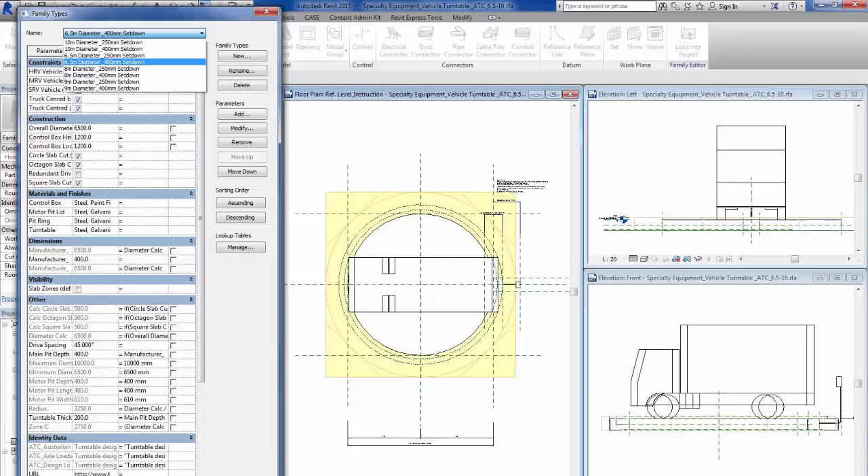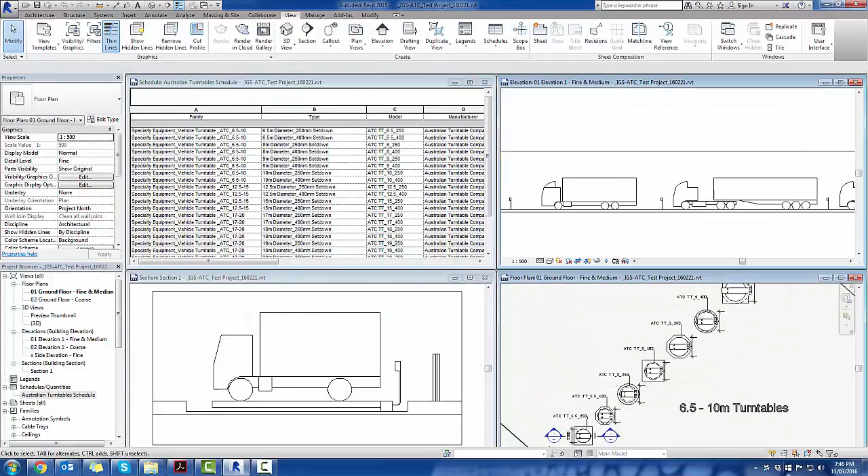Through the course of this video, you can expect to gain a greater understanding of how the Revit families have been consistently created, an overview of the product ranges available in the Revit content, as well as the selection and placement of these Revit families in a project and the key driving parameters behind each family. In addition, an insight into how the Revit families are documented and scheduled in a sample project.

The Australian Turntable Company has provided three main Revit families, allowing you to document turntables from 6.5 meters right up to 20 meters. In addition, there are standalone trucks that match the standard vehicle sizes. There's also a sample project illustrating how the individual families document and design in a project.

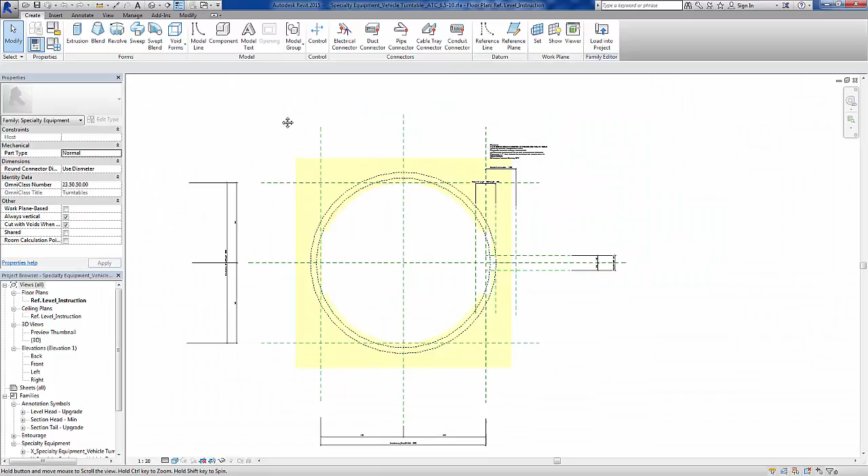What I'd like to do now is actually show you how one of the families are constructed and some of the key elements that have been considered in its creation. Like with all IGS Revit families, there is a brief disclaimer saying check the manufacturer's website for the latest information. You will also note that all reference planes have been named and set to the correct IS reference. Also, all geometry is driven from the reference planes. You'll also note that we've got our type and instance parameters all set up and driving from those reference planes.

You'll also notice at face value that we've got our Omni classification set, and as per usual, we have set up the family type properties in a way that makes sure the end user only has to deal with specific constraints and construction parameters and steers clear of the other parameters that are all the calculation parameters from the family.

In addition, we've got the standard identity data, and you will note that we have used shared parameters where possible from the Australian and New Zealand Revit standards and/or the IGS standard parameters, allowing you to schedule and document in your project consistently the turntable product as desired.

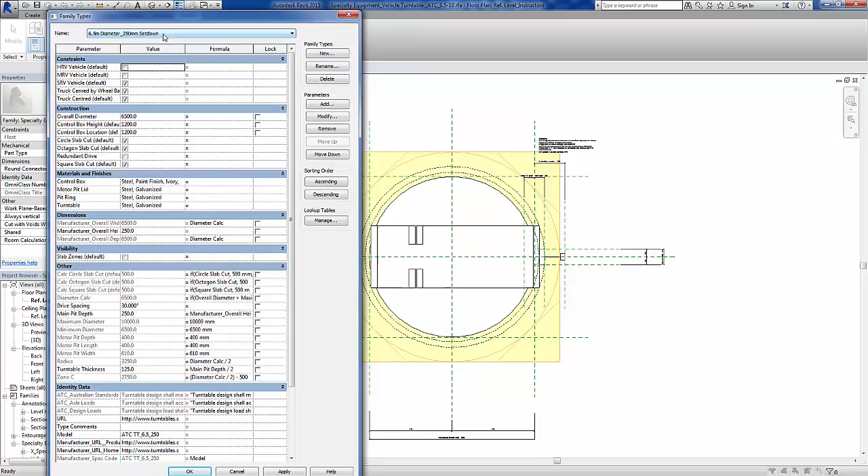So as you can see, we have included some base types that Australian Turntables has specified. This family here goes from 6.5 meters up to 10 meters with either the 250mm set down or the 400mm set down. Now the actual families, as you will see here, are actually made up of a series of nested families that are all communicating and coming together in this parent family.

But if we actually look at the main turntable nested family, you can start to see how it's driven, and again, all nice and neat and consistent. The parameters have been shared, so they report back to the parent family. In addition, you will note things like the masking regions have been applied, including the subcategories in all 2D line work, and then these have also been applied in 3D.

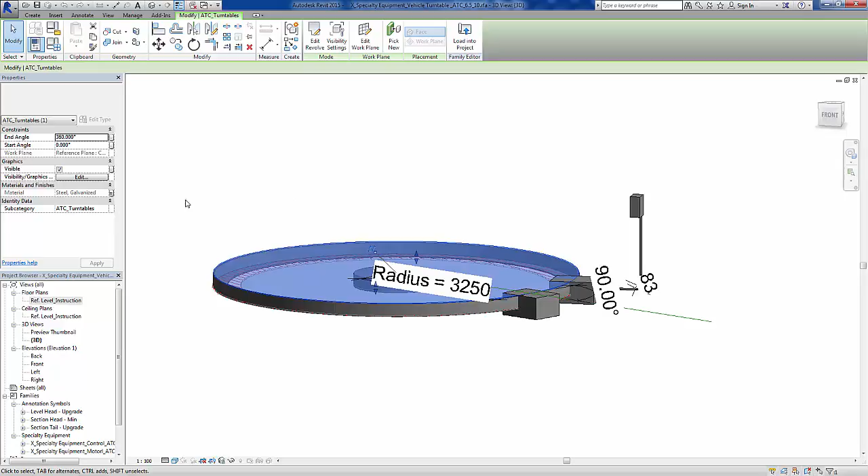But in this case, we've made specific subcategories because the Australian Turntable offering is not your standard specialty equipment, so we want them to stand out in your Revit project. We've also made sure we've purged out all items, deleted all additional fill and line patterns that come with the default out-of-the-box Revit family templates. In addition, you'll note that we've got rid of all the warnings.

So in all the nested families, this is the process we have followed. We've tried to keep them as lightweight as possible, and at the end of the day, give you the most usability and flexibility in the end project, which we will now have a look at.

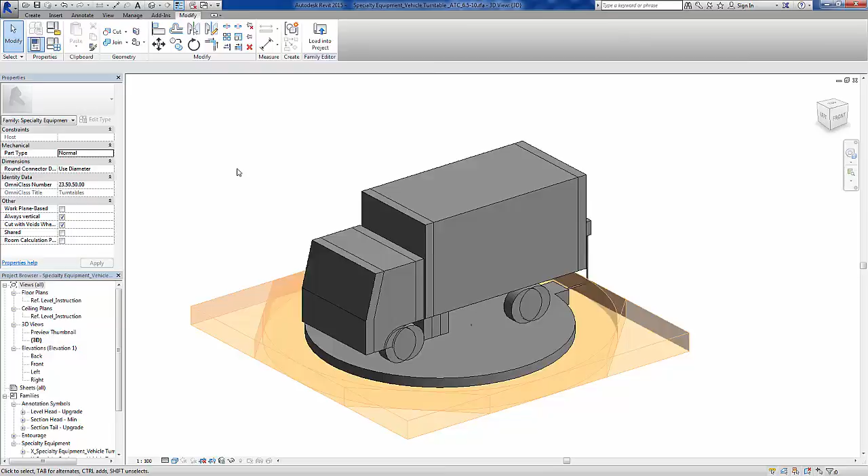I am now going to demonstrate how to use these families in your project. What we suggest, however, before we place them is to load them into Plan View as they are non-hosted, and this will load them in at the selected level. So I'm simply going to drag and drop the turntable in as we see here. I can then now grab it and place it wherever I would like.

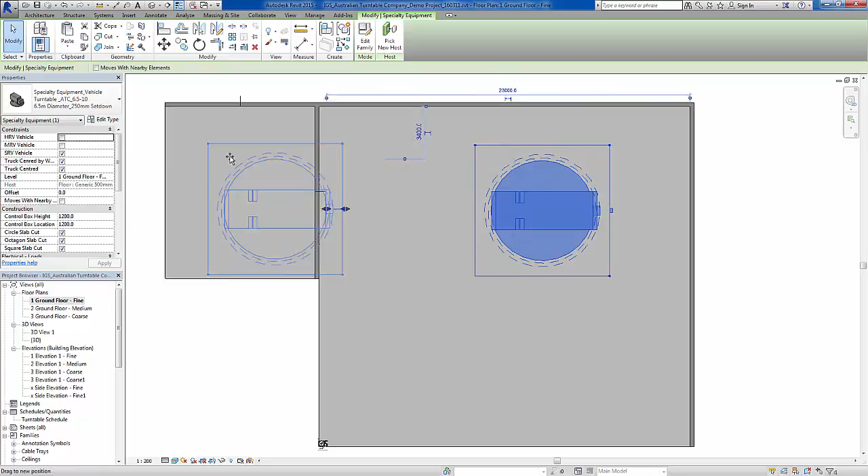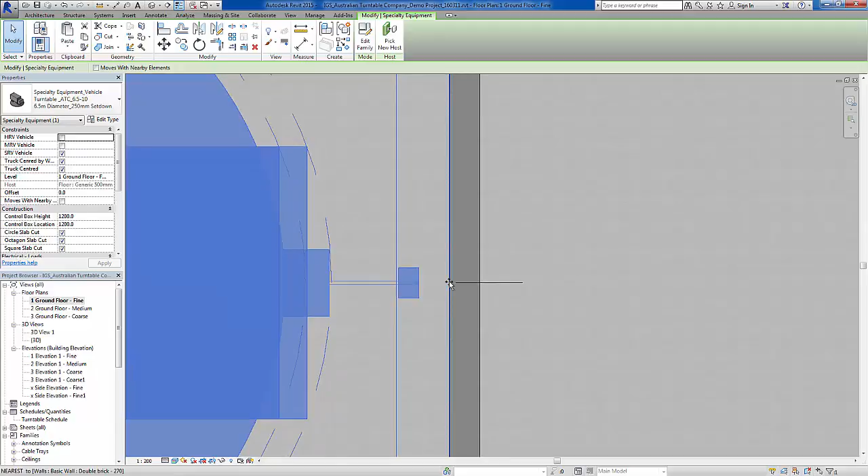I also, based on the reference planes in the family, can align it centrally to the little room I've got set up here. I've just put some annotation lines to give me those center points. Once I have the turntable aligned appropriately, I'm then in a position to drag or align the actual control box to the wall. This is an instance parameter, so it simply has those pull tabs, which allows me to do that. I can now see my turntable correctly located in this room.

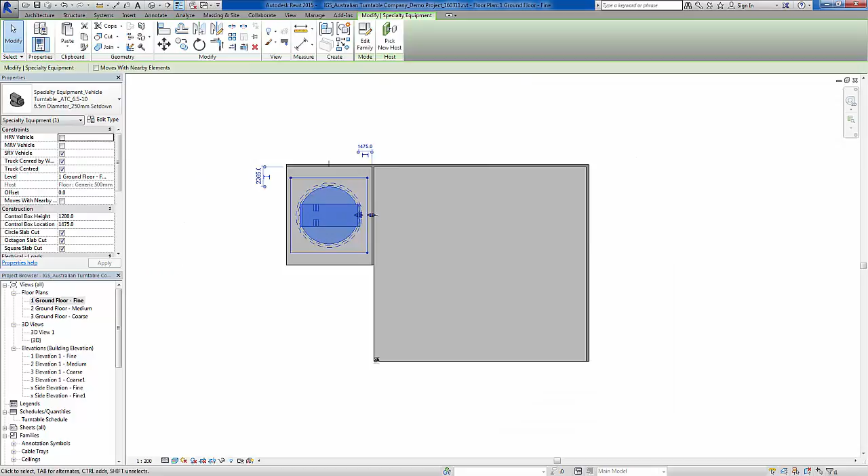If I wanted to create another version or add one of the larger turntables, I simply repeat that process. So if I go to floor plan and then I'm going to grab one of the large turntables, I simply drag and drop and place.

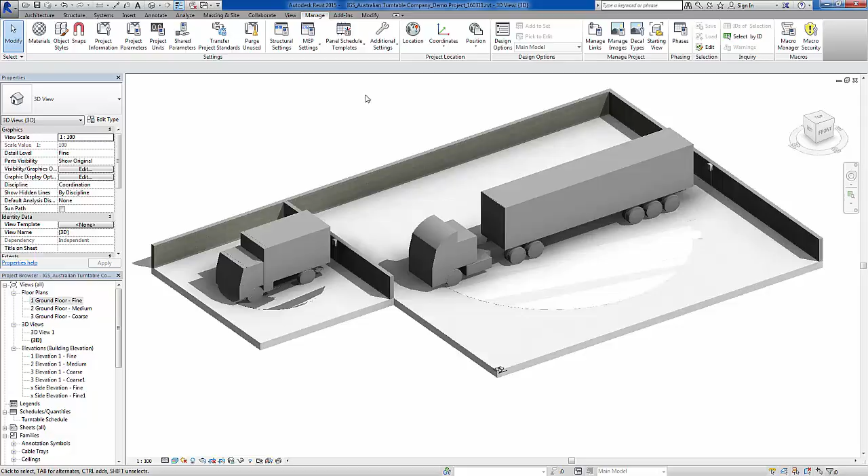And again, I align the control box. This time I'm going to use the align tool to do that. The next step is to actually cut the slab, because currently you can see the slab is not cutting, and because it's not a face-based family, it doesn't cut automatically. So what I need to do is go to the Modify tab, find Cut, and cut my slab accordingly.

You will see that by default it cuts in a square fashion. You are able to change the slab cutout shape under the properties of the family. By default they're all switched on, but if I now just turn on the octagon, you'll see the octagon shape appear. If I just turn on the circle, you'll see the circle shape appear. These allow you to create different slab cutout zones. These will be explained in greater detail soon, but this is where you activate the different functionality.

The other aspects that you can change in the project here are whether the truck is centered via its wheelbase or whether it is centered via the actual truck on the turntable. We'll explain that soon as well when we look at turntable studies. And you can also pick different vehicles that you want to show on the turntable to illustrate different scenarios.

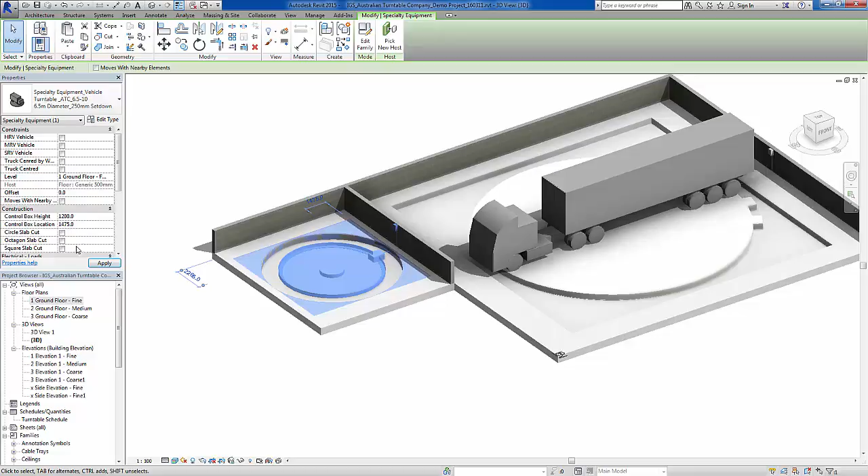You're also able to turn off all of the trucks and all of the slab cuts in order to just get a turntable. And in this case, you can then apply some of the turntable trucks that we supplied with the rest of the Revit families and create your own scenarios, like placing 2 small trucks on the one turntable. In addition, you can cut out your own slab based on your own scenario, which we can look at a bit later.

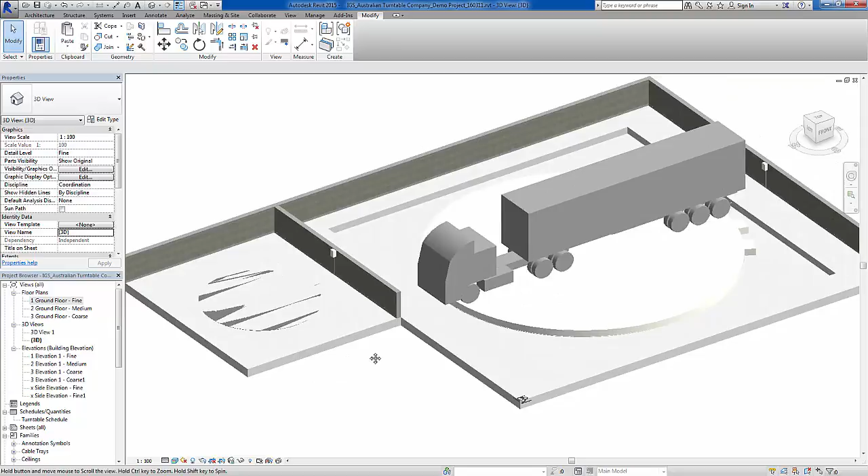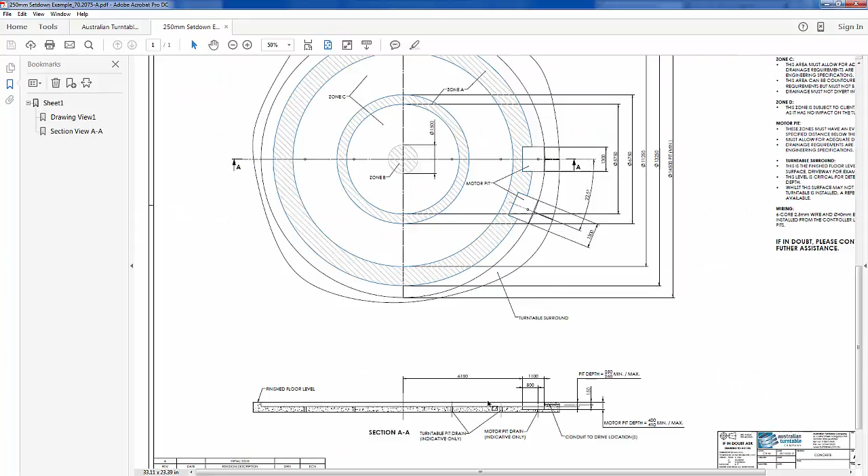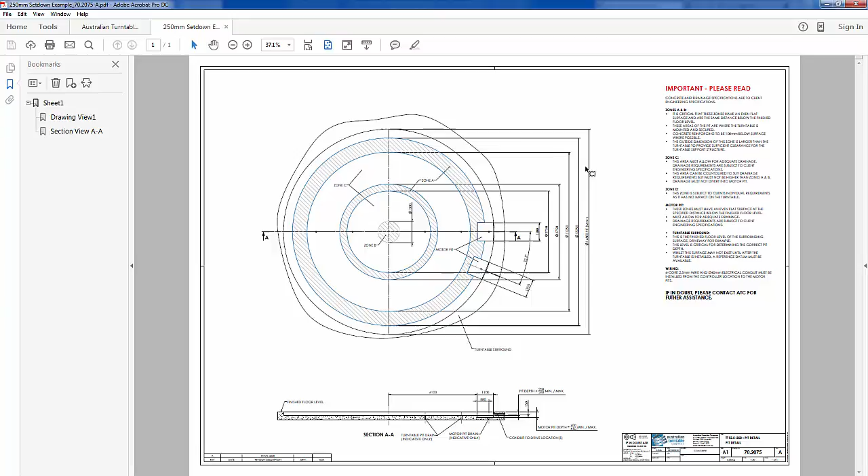2 items I now want to have a look at are the cutout area as well as a turntable study. The first is the cutout area. These areas actually indicate the required slab zone that has to meet the height of the finished face of the turntable. What we suggest is discussing your specific requirements with Australian Turntables, as the Revit family certainly gets you a long way towards the actual documentation and details required for a given project, but for the specifics on the actual set down zones and finish levels, we suggest chatting to Australian Turntables directly.

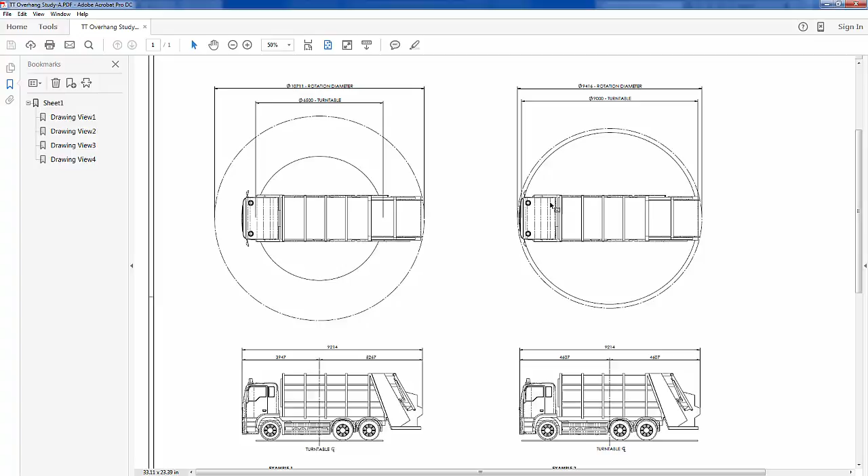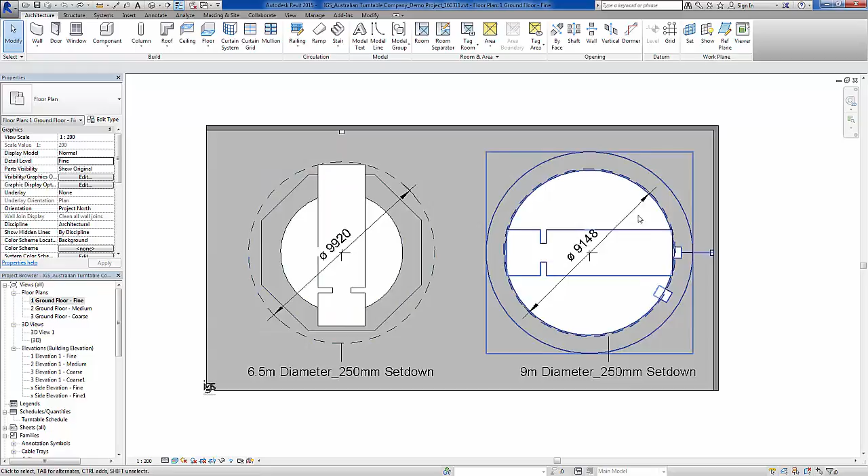These same turntable studies are also now able to be produced in your Revit project. And what this will actually allow you to do is to place a variety of different trucks and turntables in your project and assess the impact. As shown again, a smaller turntable with the same size truck actually has a larger footprint requirement in order to rotate that truck, as opposed to when a larger turntable is used. Again, to illustrate the point, I can change my trucks and accordingly change my turntable requirement. Please do be aware that you can obviously put trucks on here that are potentially not possible.

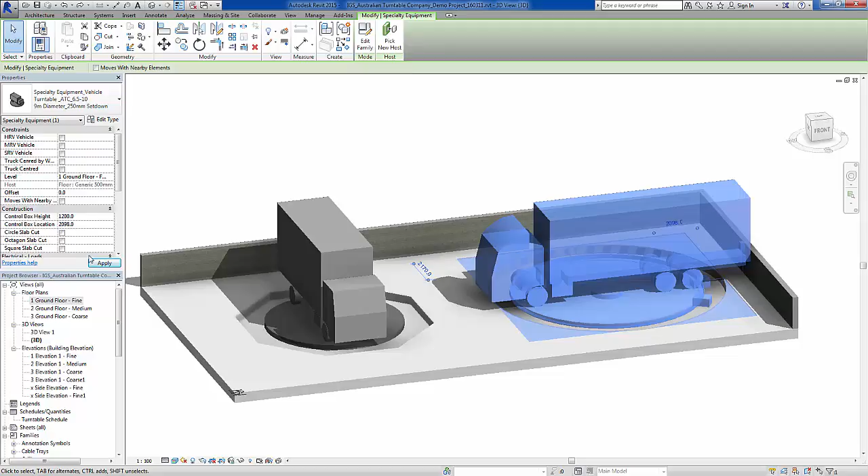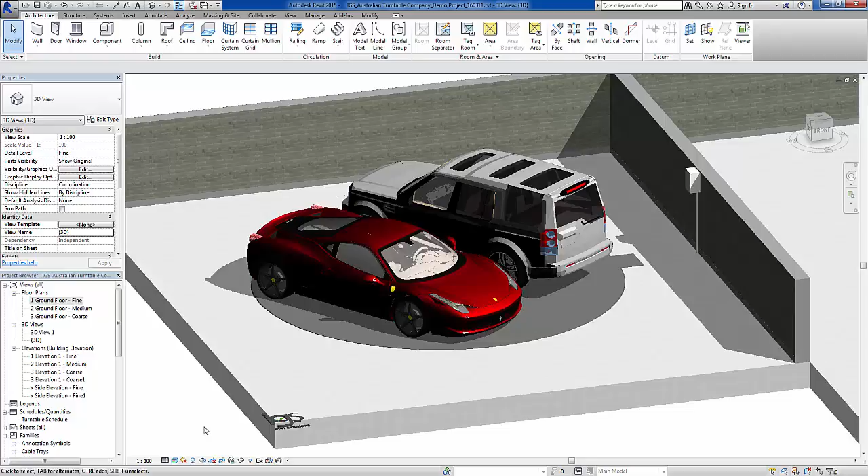As mentioned earlier, it is possible to turn off all of the vehicles as well as the slab cuts on the turntable, leaving you just with the base turntable. You then will be required to create an in-place void model that will cut the slab so that the turntable and the finished face of your slab are aligned, as shown here. Once you have turned off all of the products and added the void, you're in a position to be able to visualize unique circumstances and vehicles that you want to rotate on your turntable. Feel free to get as creative as you would like.

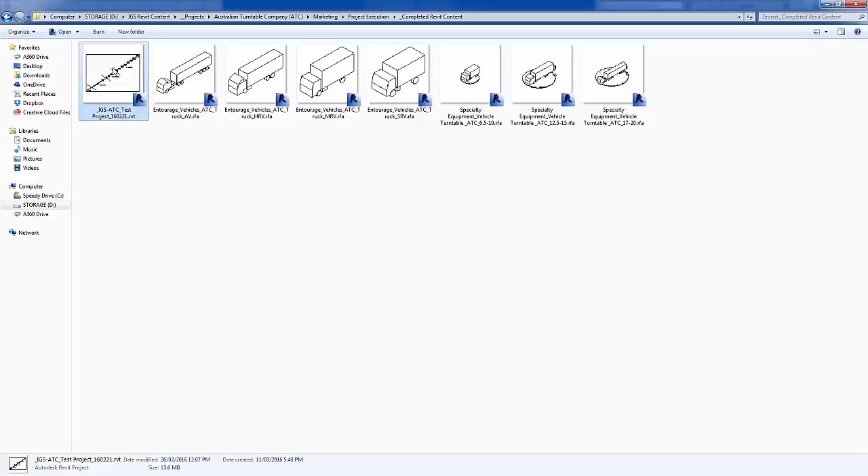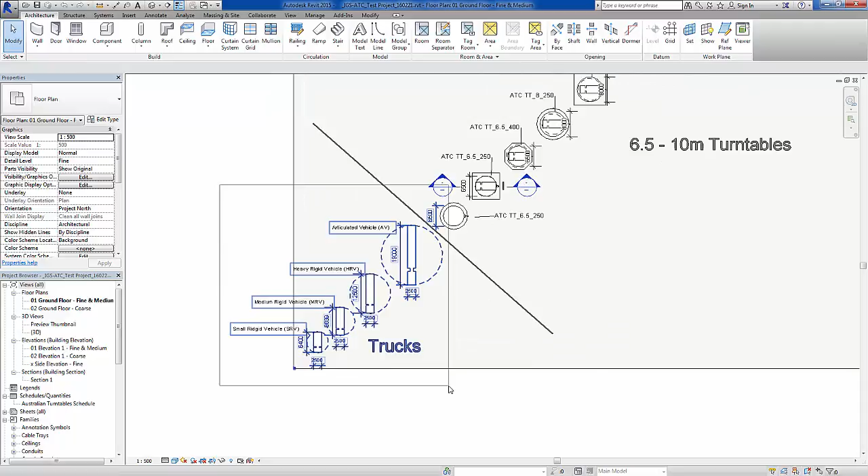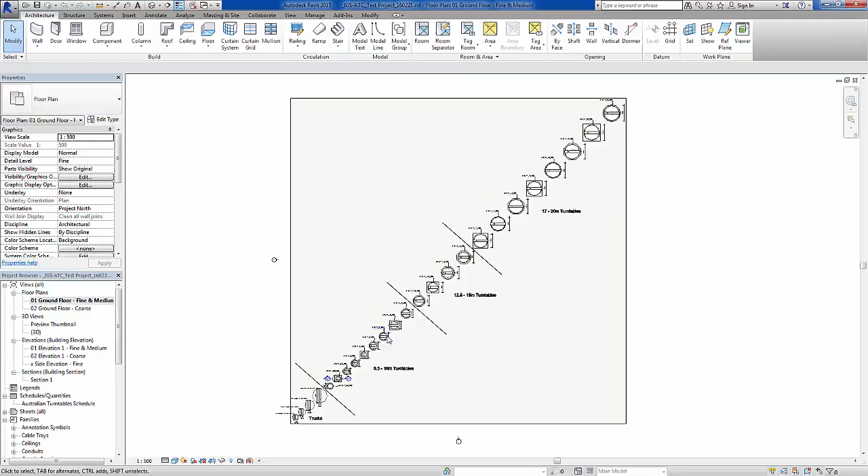The final item I would like to demonstrate is the Australian Turntables sample project. As shown here on Load in Floor Plan, this sample project shows an overview of all of the standalone trucks complete with turntable study associated, in addition to the 6.5 metre to 10 metre turntable family, the 12.5 to 15 metre family, and the 17 to 20 metre family. We have laid these out based on the types that are supplied out of the box with the families, as well as supplying an overview of how they document in fine and medium detail, right through to coarse detail in pre-made views, as you can see the trucks disappear.

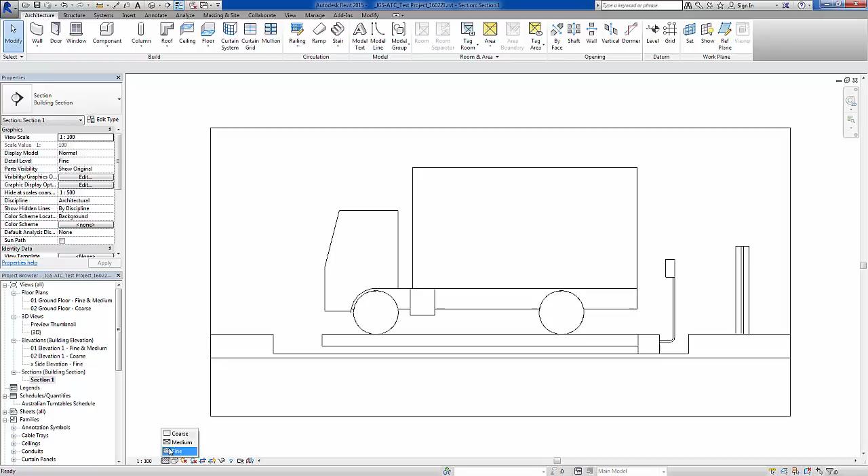We've also included pre-made elevations that show how the products document and give you the opportunity to start to play with the products before placing them in your project. We have also demonstrated how the products document in section, here demonstrating fine, medium, and coarse level of detail, where we only show the turntable itself. In addition, in the sample project, you can see a detailed schedule outlining all of the key shared parameters available to be specified by the end user.

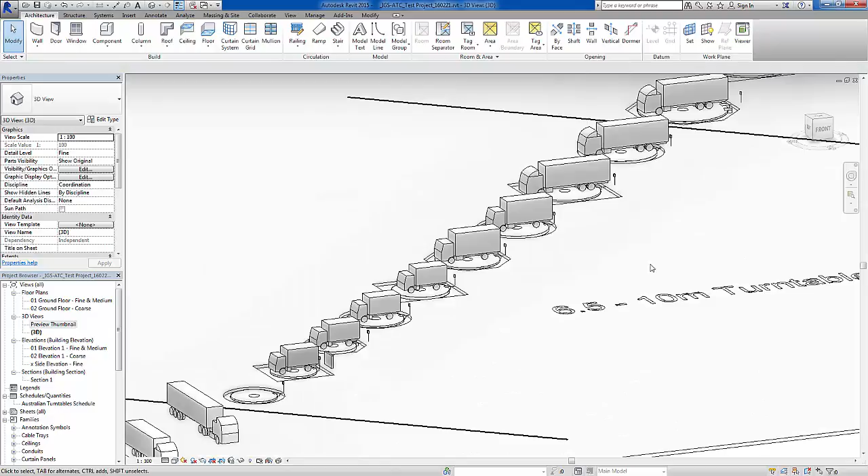We trust that this Revit content overview video has been valuable, and should you have any further questions and/or specific project requirements, we suggest you contact Australian Turntables directly.